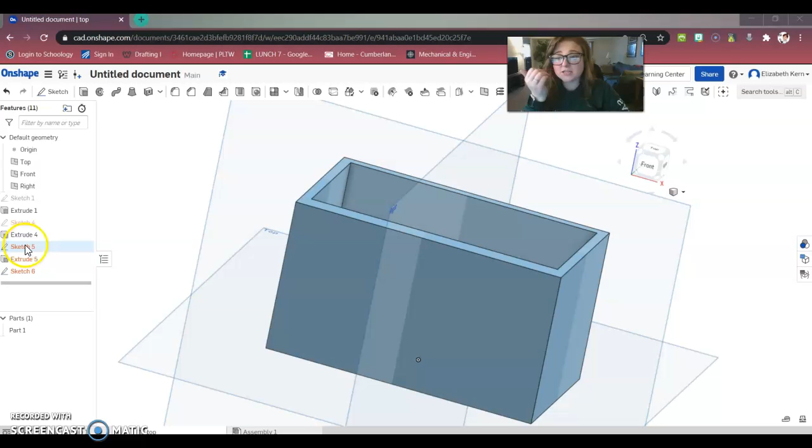Alrighty, folks, I'm going to quickly go over how to create a hinge in Onshape. Any of this will work for any shape that you have. I'm just choosing to do a rectangular shape because it's going to be the quickest for me to explain to you right now. So that is why I'm going over it. Again, you can do any shape.

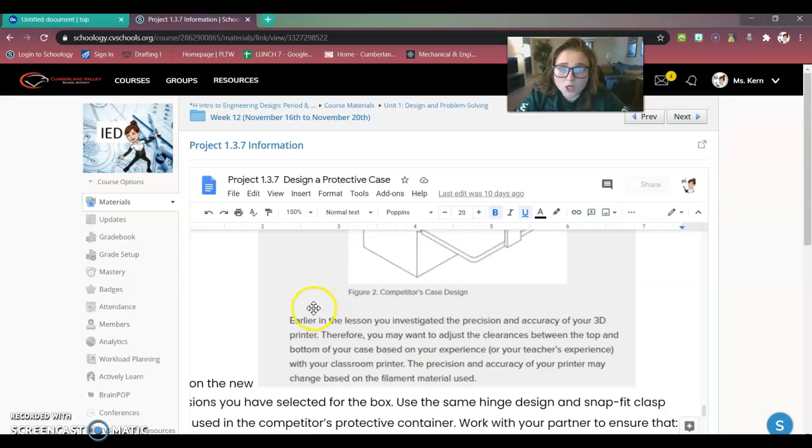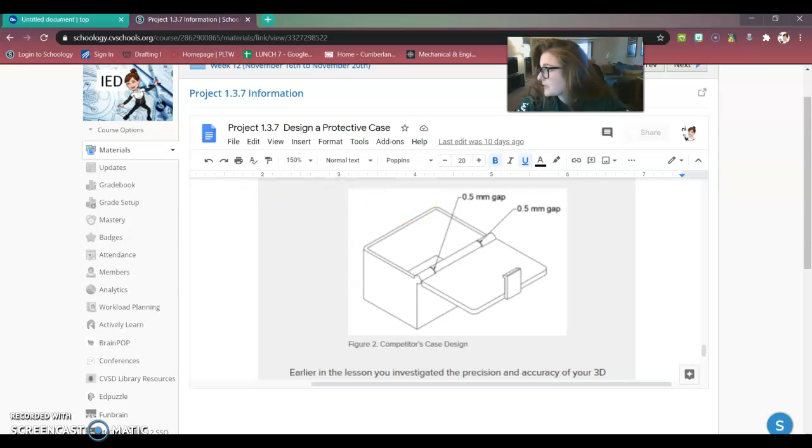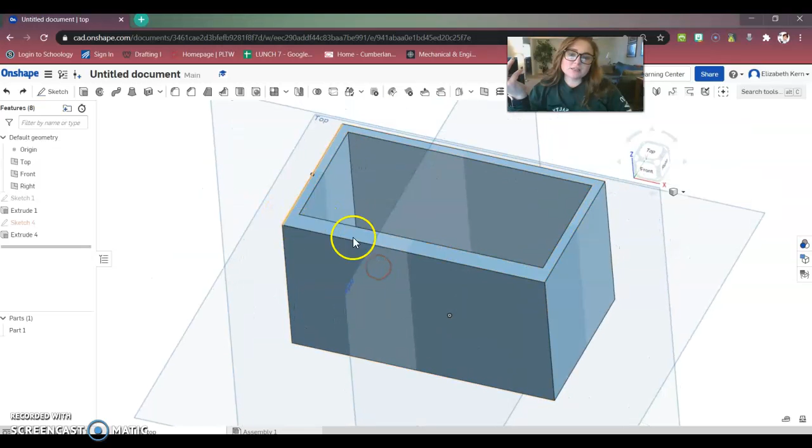So what I've done so far is I've created a rectangle. You create whatever shape you have for your protective case. Some of you may know about the shell feature, which allows you to create a hole without drawing the box, but I personally like to give where my hinge is, the back of the case, a little bit more thickness so that the hinge has something to rest on. So I had to draw lines and then extrude that rectangle down, giving myself some more room in the back.

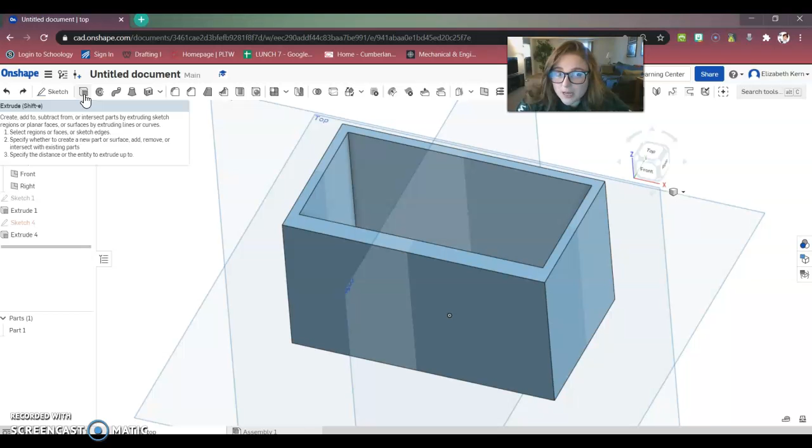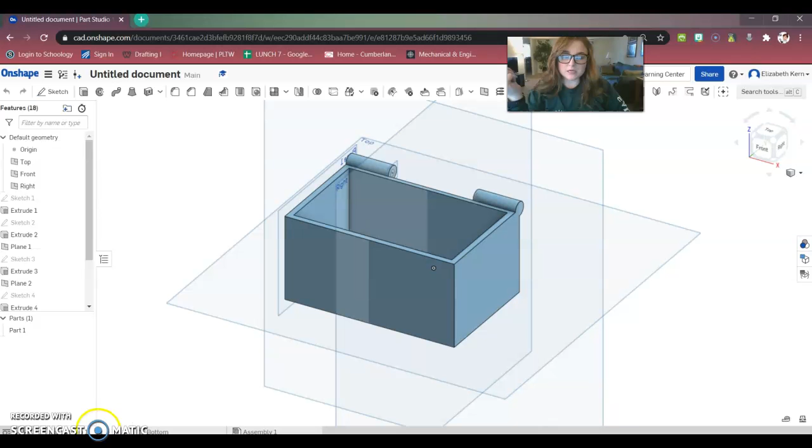So the first thing I'm going to do is create a space for my hinge to rest. This is going to be two pieces, obviously. I have this as the top, but this should actually be renamed bottom. And then you'll have two as well. So when you do this, make sure you have them both down here. I've actually got two bottom pieces, so let me see if I can just delete. Yep. That's gone. I still have my bottom over here.

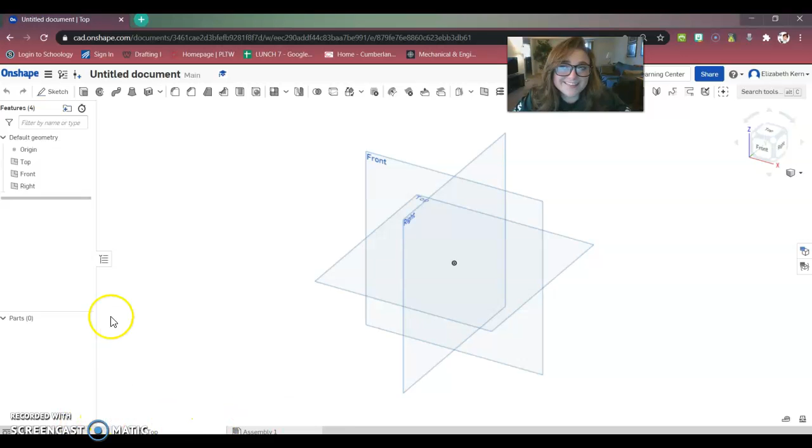And then I can hit plus, create new part, and I can rename this as top. That's how I want you to have yours created as well, so that they're easy to assemble once you're finished. So top and bottom in the same file, but on a different page, if that makes sense.

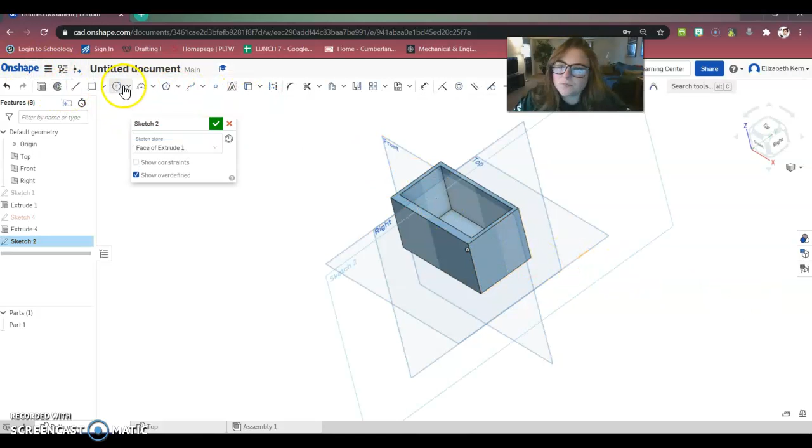Okay, so back to this. I need to clear out the space for my hinge. You're probably wondering what that means. I'm not going to hit extrude. I'm going to hit sketch, click on this plane, grab a circle, go up to the top corner, and draw a circle that's 0.25. Check. And what I'm going to do first is extrude that and remove it. I want to remove.

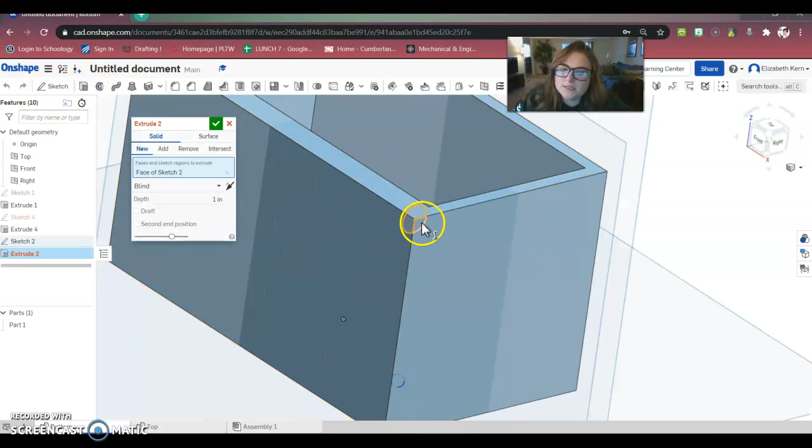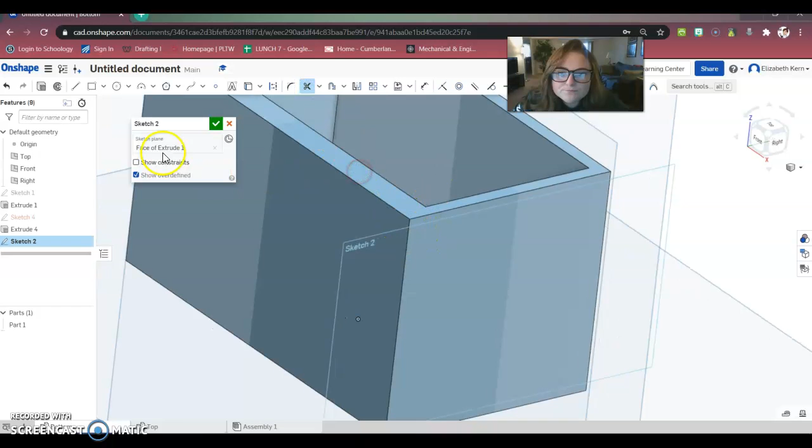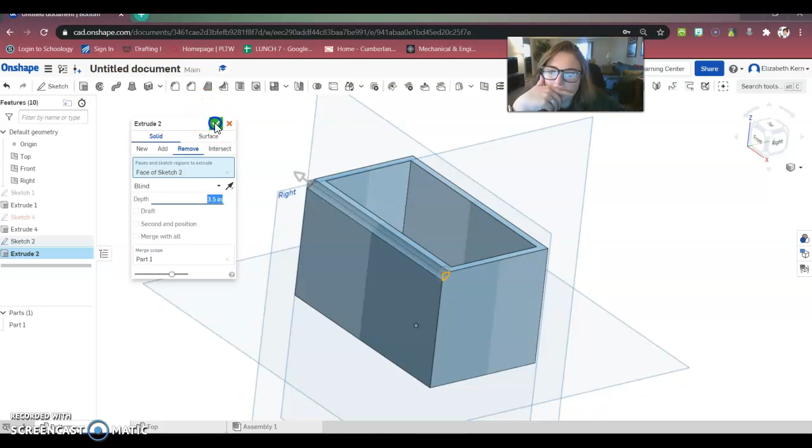So for some reason, let's do this actually. We'll go into our sketch, double click. See if I can't trim off. Nope. Alright, we won't go into our sketch. Let's just go back and see if we can click on this, and I'm going to hit remove. Good, that's going to work for us. I'm going to remove that all the way across, which I think I made my box 3.5. Yeah, good. Check. So that's giving room.

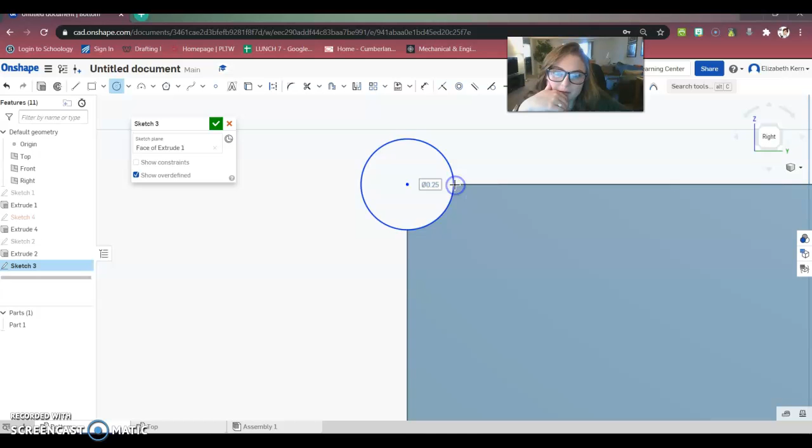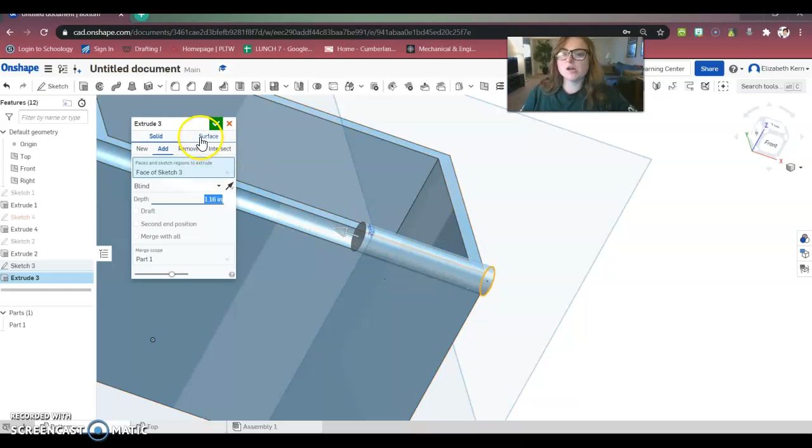Now I need to draw back in place some of that material. So I'm going to hit sketch, hit this face again, grab a circle and find that point again. There we go. Concentric. You saw the concentric constraint pop up. 0.25. Bam. Check. Extrude this. I'm going to go this way, and I want to go a third of the distance: 3.5 divided by 3. Let me double check. 1.16 for me. Whatever a third of yours is, you'll go a third. Check. There it is.

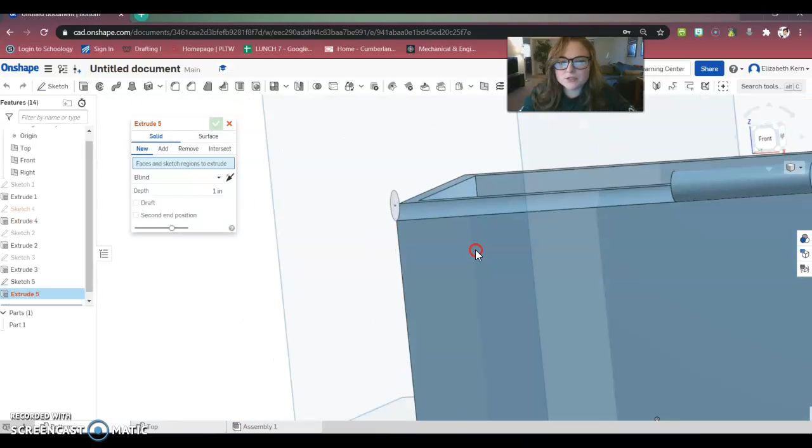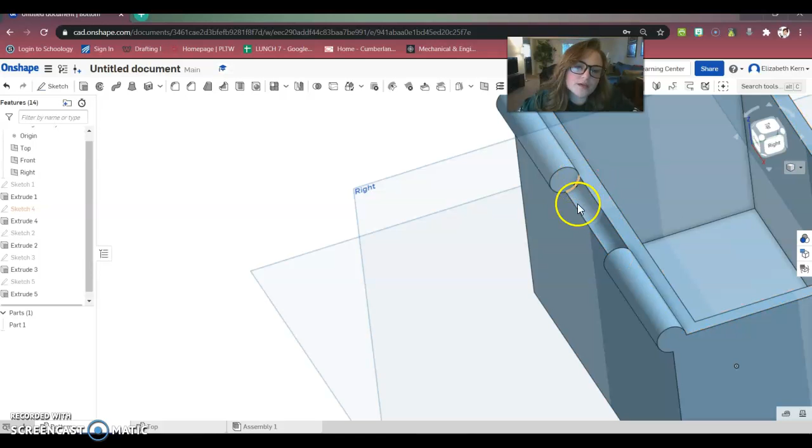And then I'm going to sketch on this face and do the exact same thing so that I create another part of the hinge. So concentric. Check. Extrude. This time we're adding material. 1.16. Check. All right. There's the start of my hinge. I had to remove this material so that when we create the top of the container and put them together, they fit as well. All right. So that's the first part. If I go to top, what was I drawing on? So that they line up.

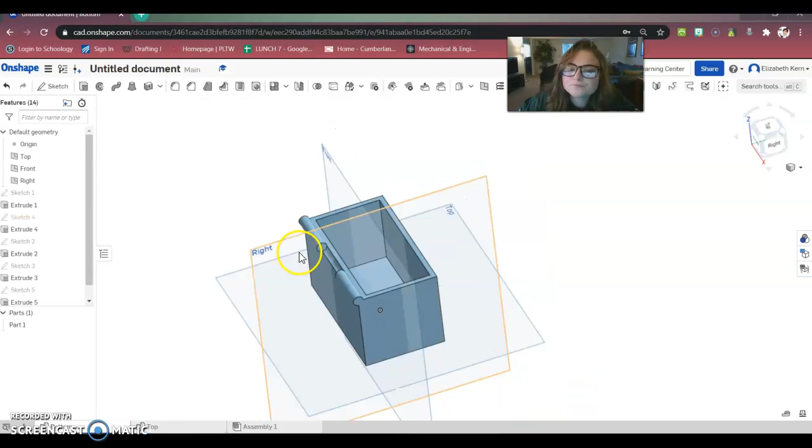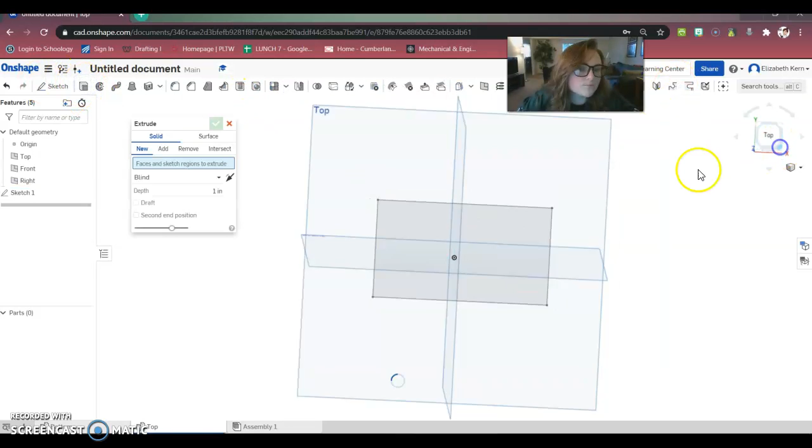I'm going to draw on my top. I'm going to sketch top and create a rectangle that is 3.5 by 2. Check. I'm going to extrude that. I'm only going to make this 0.25 thick because it's my top. I don't need it as thick as my bottom. And then I'm going to create a plane.

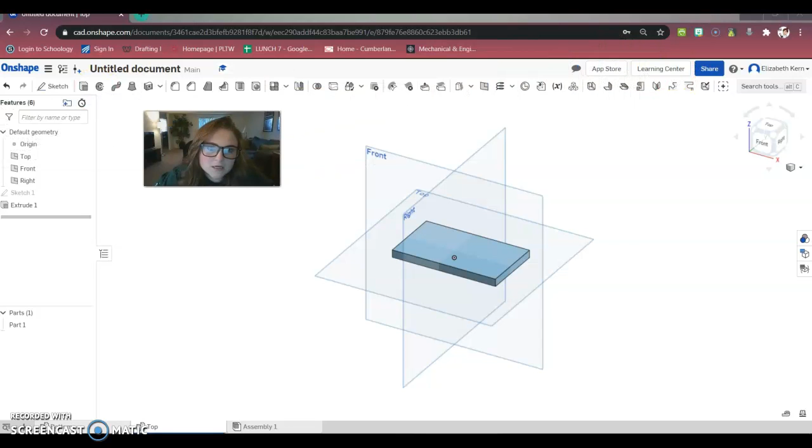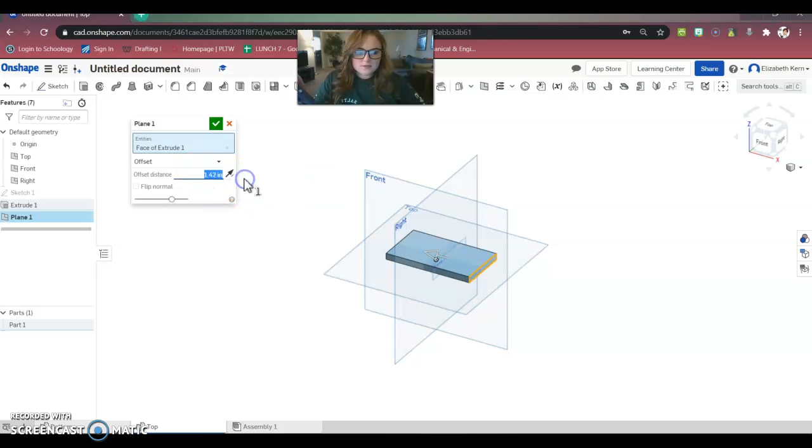Okay, I want it to go this way, and I want my plane to be halfway between 3.5. So 3.5 divided by 2, I'm going to make it 1.75 offset from that edge, and that puts my plane in the middle. Now what I can do is I can sketch on this plane I just created a circle.

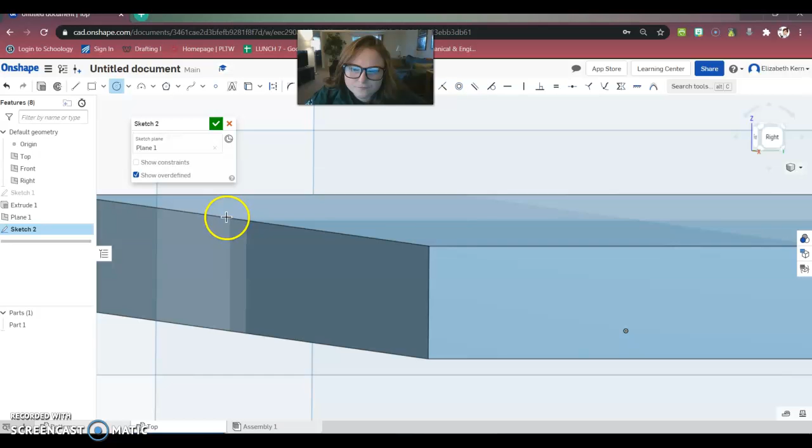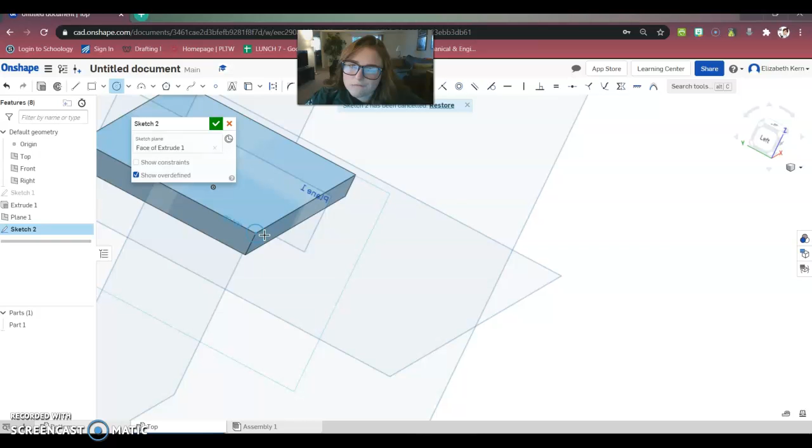Maybe. Hello, let me work. Maybe not. Maybe that wasn't the best move. Let's see if we can't sketch here. Okay, well that'll let us do that. So let's do that. We'll do 0.25.

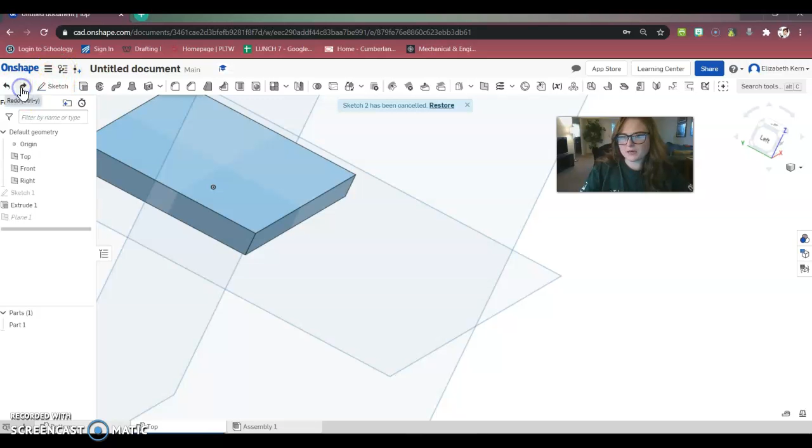What's this? Construct. Offset. Let's offset this circle. Oh, no, that's not gonna work. Wait, bring it back. Interesting. We'll try that again. Oh, we do have to remove. Okay, so we do have to remove all that material too.

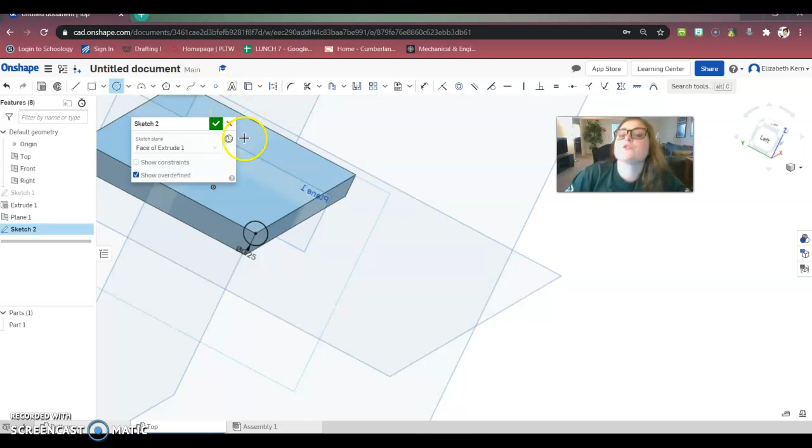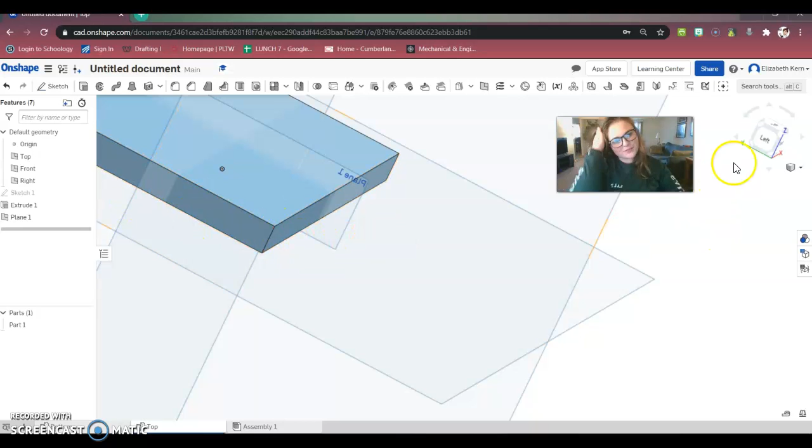So we've got to take this going through, but we need to remove material. There we go. And I just realized I'm doing it on the wrong one because this is the top of the top part. I want it on the bottom of the top so that they line up, if that makes any sort of sense. I need to be drawing the sketch down here.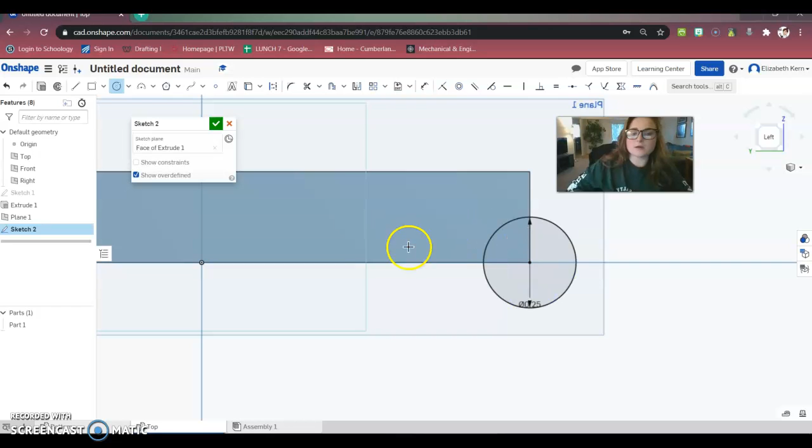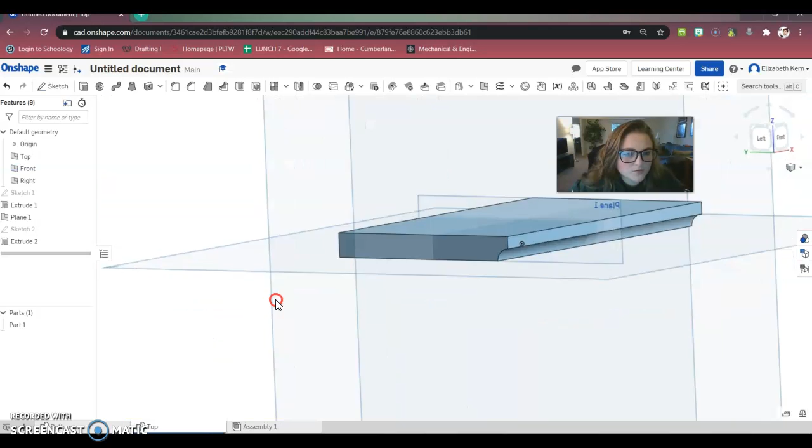So 0.25. Nope. Too big. There we go. Check. Extrude. Remove. Check. Alright, that gives me a good start. Good, so now you can see how those two would fit on each other. So now we need to go put in this middle piece for our top so that they can line up.

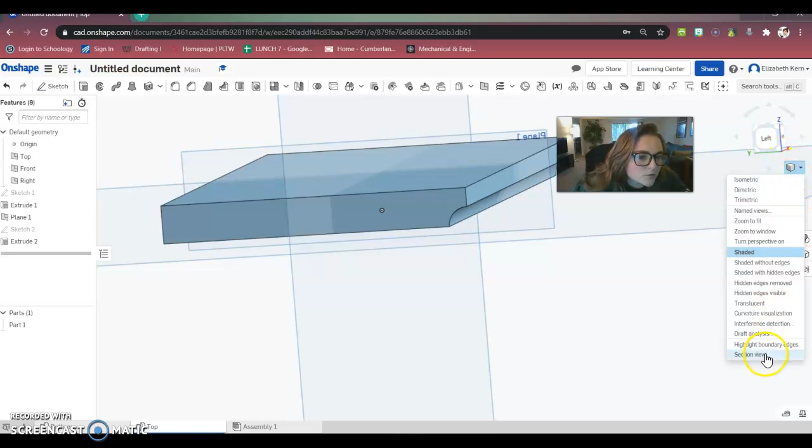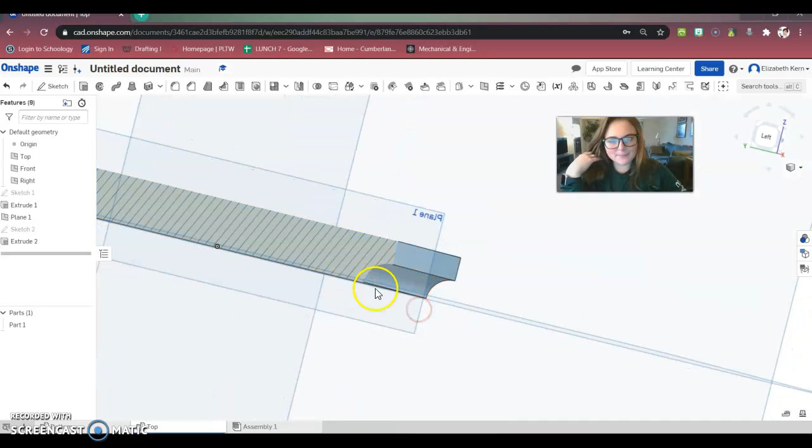So I'm gonna view a section because I want to only view half of it. That's not the one. Here's our section view. Look at that. And here are our section lines. We learned about those. That's what a section view looks like in half, when you can only see the piece that you're looking at. So let me come back to you once I get my circle in place and I'll go over how I did that then.

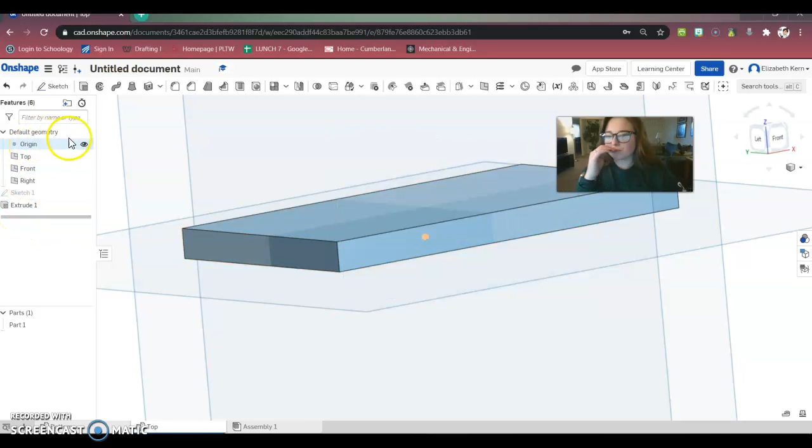All right, so I changed my mind and I deleted some of my stuff. And honestly, all I'm going to do is extrude and remove, if it lets me. Why is it not letting me? Here's what we're going to do. We're going to delete all of this. We're going to delete our extra plane because we don't need it. And we are going to sketch here, bam, circle, 0.25, check, check.

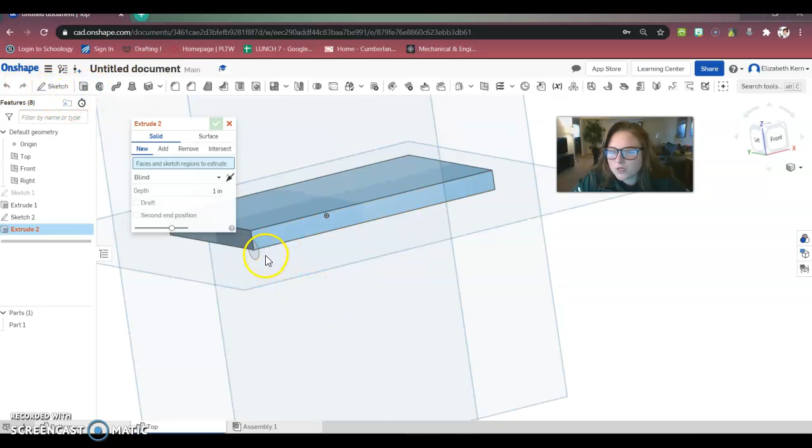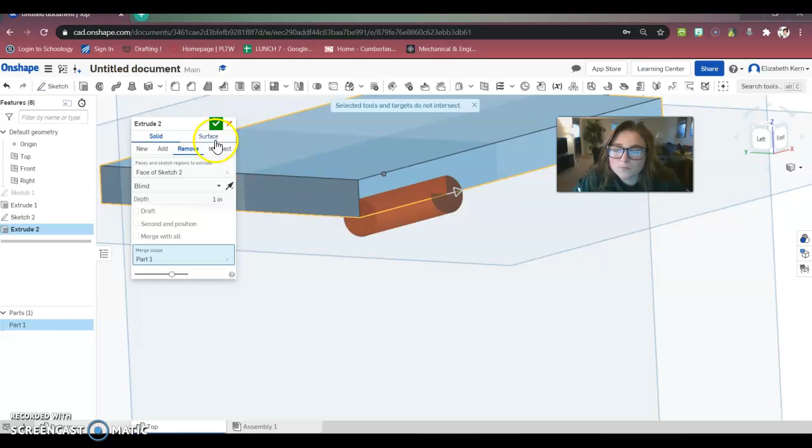And I'm going to extrude. Want to click on all of this, but I want to remove, intersect, remove. Let's see if we can get it to work this time. Just like we did before. But I'm only going to go 1.16 this way.

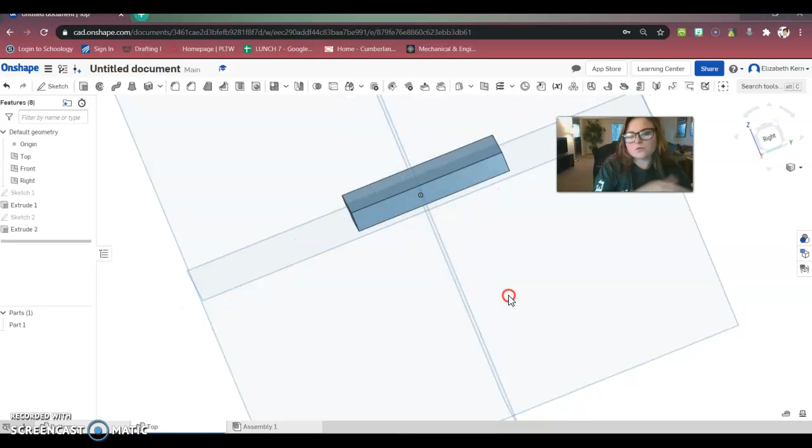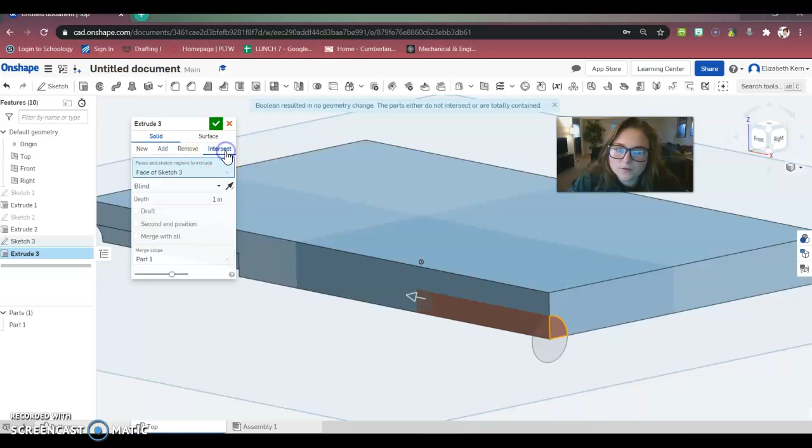Check. I'm going to go over here, sketch on this face, look at it straight on, sketch 0.5, check, sketch. We need to click on this, but we want to go the other way, intersect, remove, again, check. All right, so we have that space for our hinges. Now we just have to create the other hinge, I guess you could say.

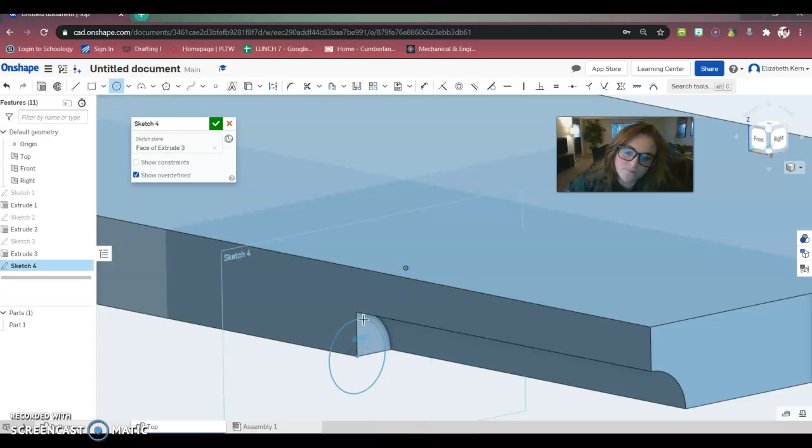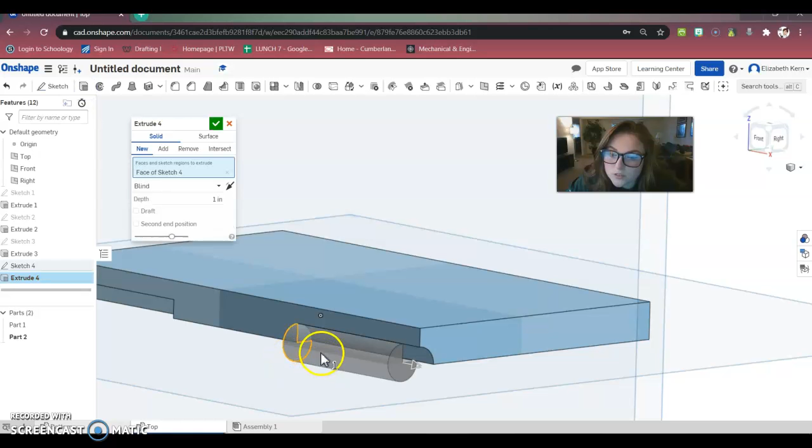So I'm going to sketch there, see if I can't just draw. There we go. Cool. I'm going to extrude this, but I want it to go the other way. But I don't want the piece that I selected. I want this outside version. I want to change the other direction. Is it letting us do that? No.

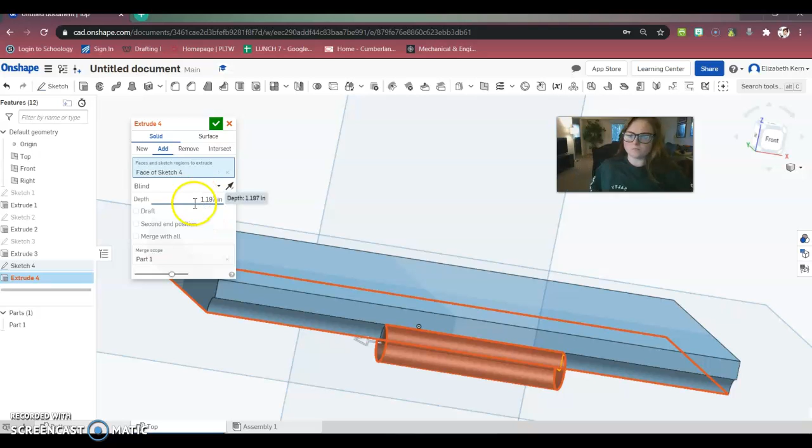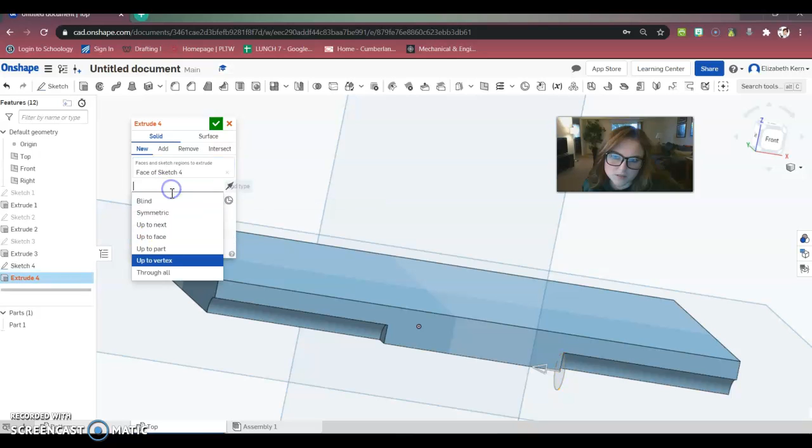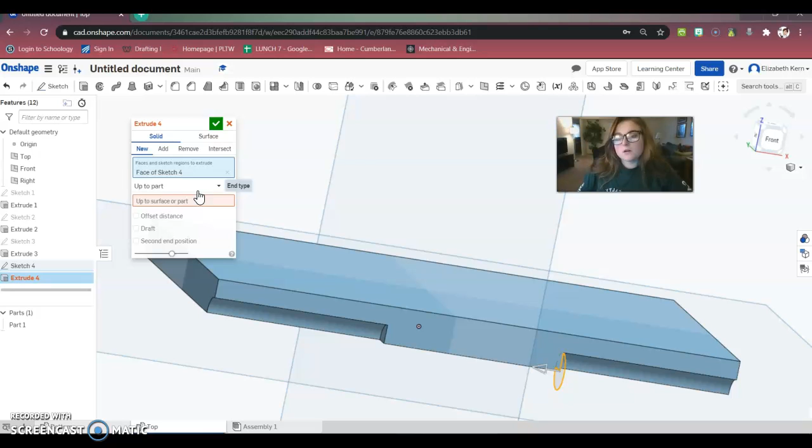Let's try that again, sorry. Flip the direction. Next face is not what we want. Up to next. What? Oh, I don't want to choose that. So ours is going to be blind, and we can do ours at 1.18. Check. And that will give us our shape. Bam, there you have it.

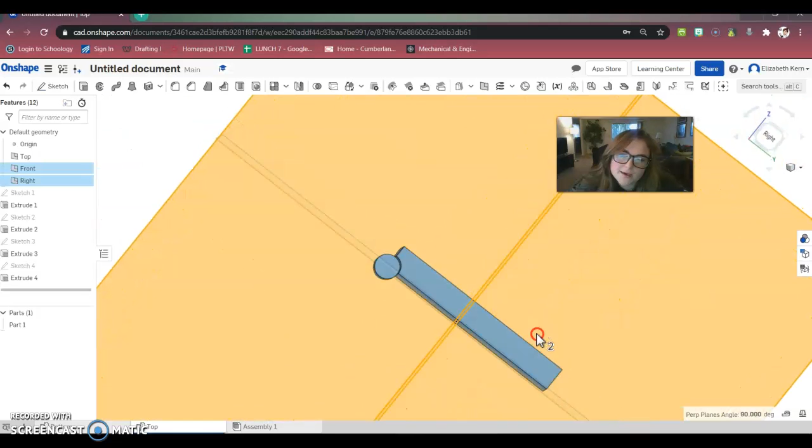There is our hinge. I know that took a little bit longer than expected, but I was figuring it out right along with you guys. So you can see our bottom and our top. For those that are still struggling with Onshape, I want you to stop here.

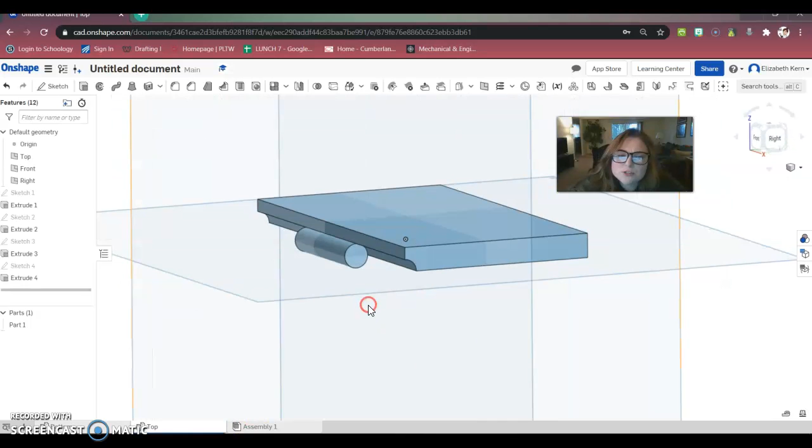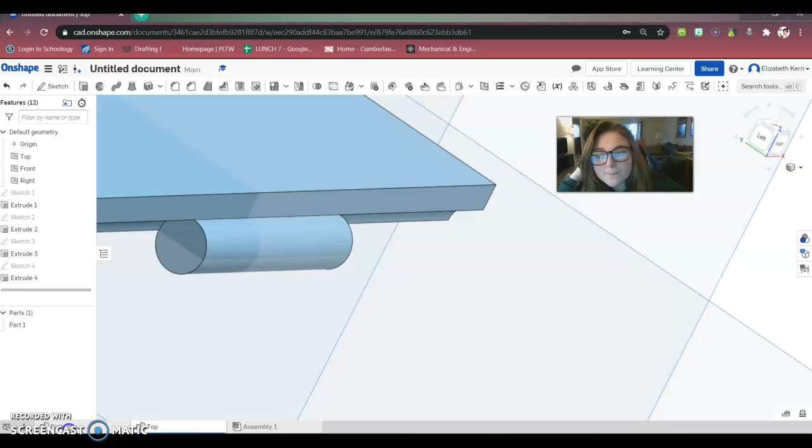For those that really have been doing well with Onshape, and you know who you are, and I can call you out if you pretend to not be one of them, I would like you guys that have extra time, that finish early, to create a little divot on both sides of the top, and then on the bottom create little bump outs so that they could rest inside and be able to rotate back and forth, okay? But that is what I have. Hopefully it didn't confuse you too much.

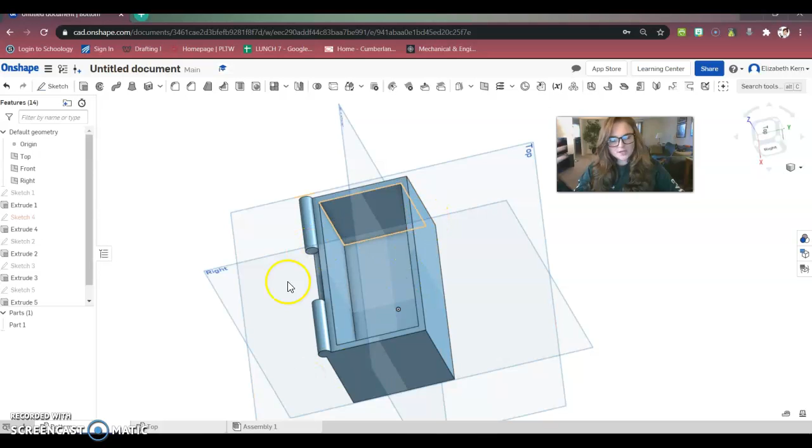Creating the top and bottom separately, but in the same document, just on different sheets, makes your assembly a lot easier. Removing and extruding our circles to create our hinges, and then those that have extra time to kill, creating those little divots and those little bump outs so that they have something like almost a joint to sit in and rotate on. Okay.